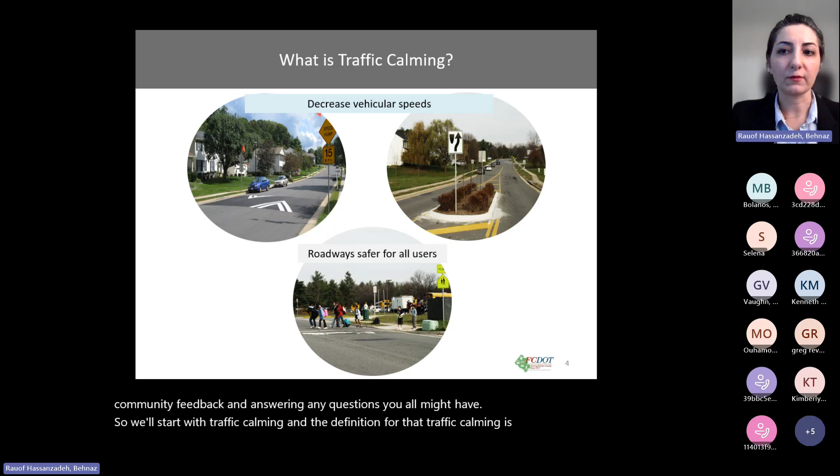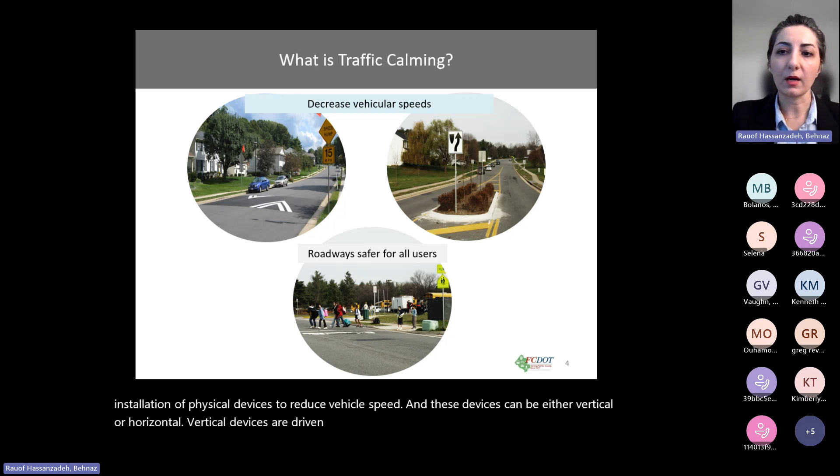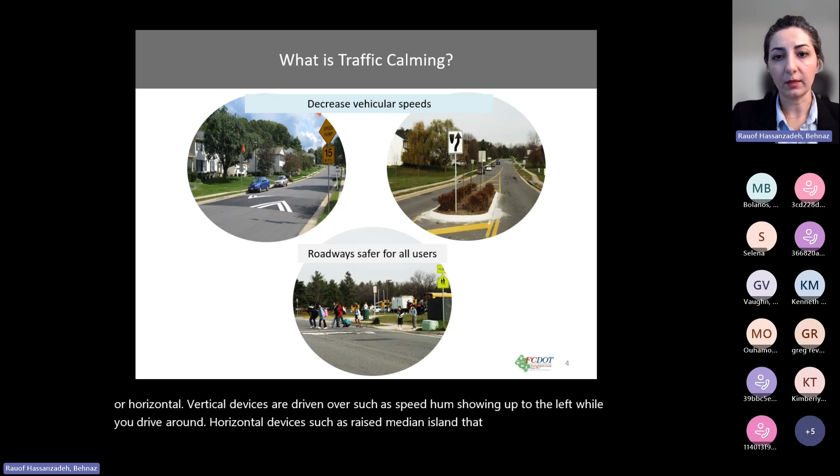We'll start with traffic calming and the definition for that. Traffic calming is generally the installation of physical devices to reduce vehicle speed, and these devices can be either vertical or horizontal. Vertical devices are driven over, such as speed humps shown to the left, while horizontal devices, such as raised median islands, are shown to the right of the screen. Both types of devices make the road safer for drivers, pedestrians, and all other users. And we want you to know that through this process, we are not permitted to install stop signs.

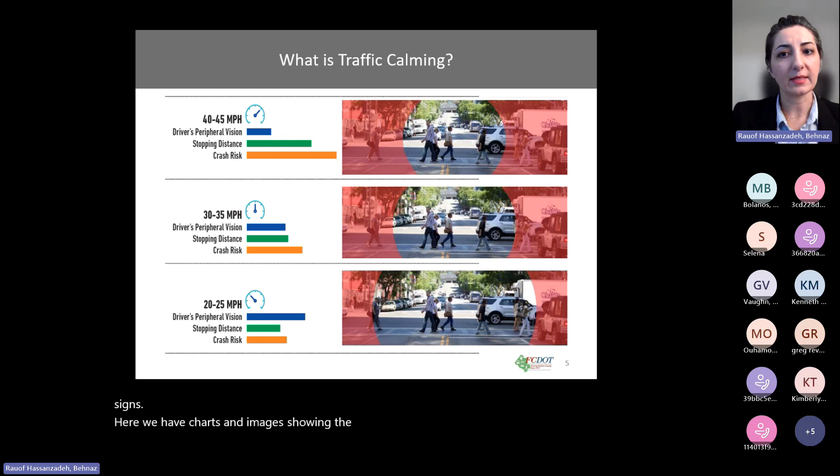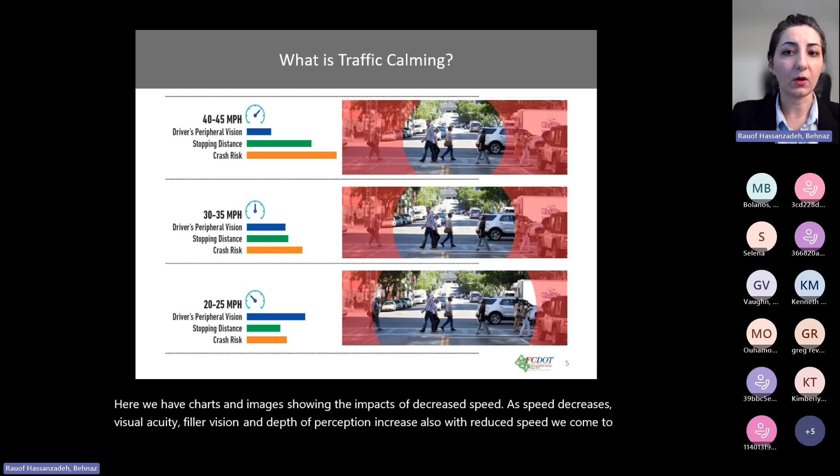Here we have charts and images showing the impacts of decreased speed. As speed decreases, visual acuity, field of vision, and depth of perception increase. Also, with reduced speed, we see a significant reduction in the number and severity of crashes involving motor vehicles.

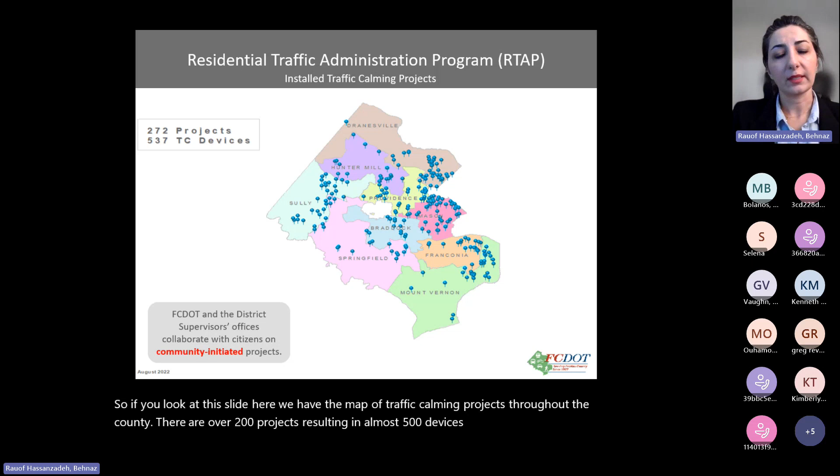If you look at the slide here, we have the map of traffic calming projects throughout the county. There are over 200 projects, resulting in over 500 devices countywide. Every district has these devices, and chances that you've driven over one are pretty high.

The RTAP program can be broken up into 5 steps. Step 1 is project initiation, step 2 is plan development, step 3 is community engagement, step 4 is ballot phase, and step 5, the final step, is project installation. Let's go through each step one by one.

As you might know, all traffic calming projects are always community initiated. The process begins with a request from the community to the supervisor's office. Once the request is received, we will first complete a basic eligibility review. Next, we will conduct the traffic study, and once it passes both the eligibility and traffic study, the community then forms a task force.

There are eligibility requirements that need to be met: the road needs to be a VDOT maintained road, have a 25 mph speed limit, be functionally classified as local, collector, or arterial, and if it is collector or arterial, it needs to be a residential street.

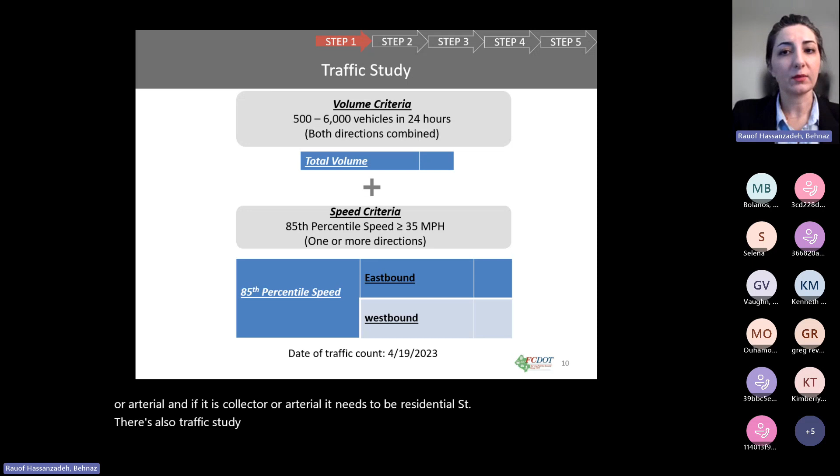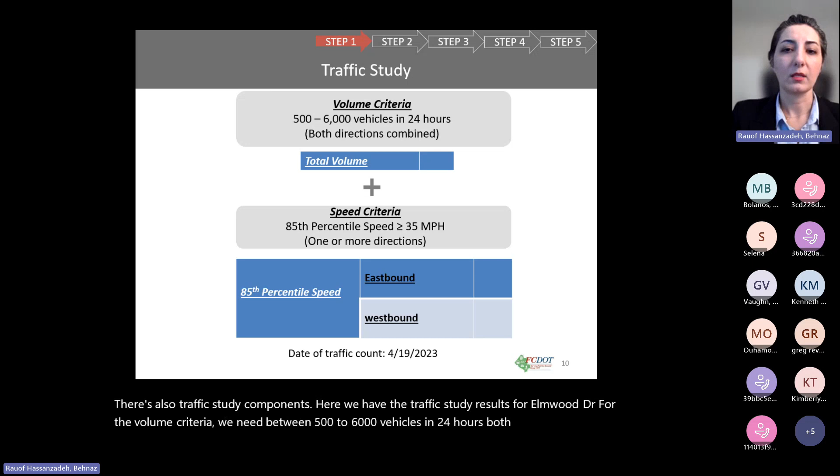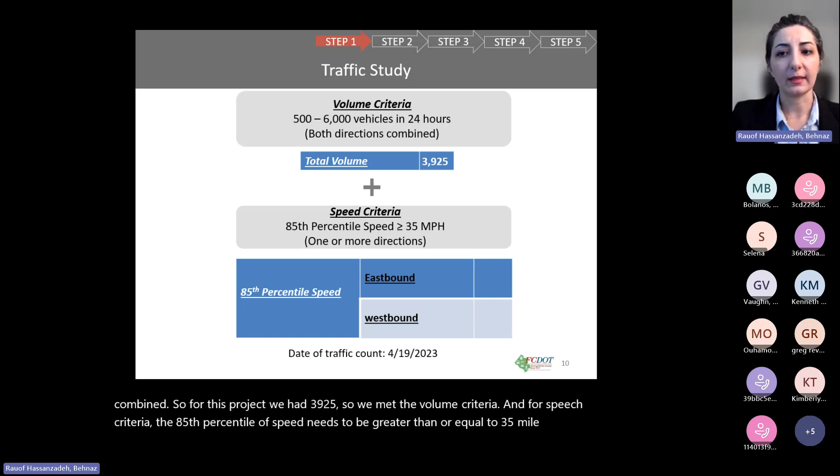There are also traffic study components. Here we have the traffic study results for Elmwood Drive. For the volume criteria, we need between 500 to 6,000 vehicles in 24 hours, both directions combined. For this project, we had 3,925, so we met the volume criteria. For speed criteria, the 85th percentile of speed needs to be greater than or equal to 35 mph in at least one direction of travel. The speed that we found was 40 on eastbound and 35 on westbound, which means we met the speed criteria as well.

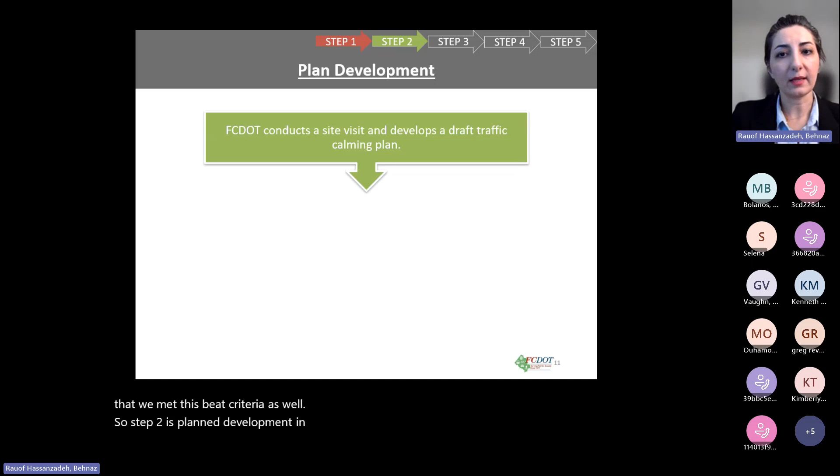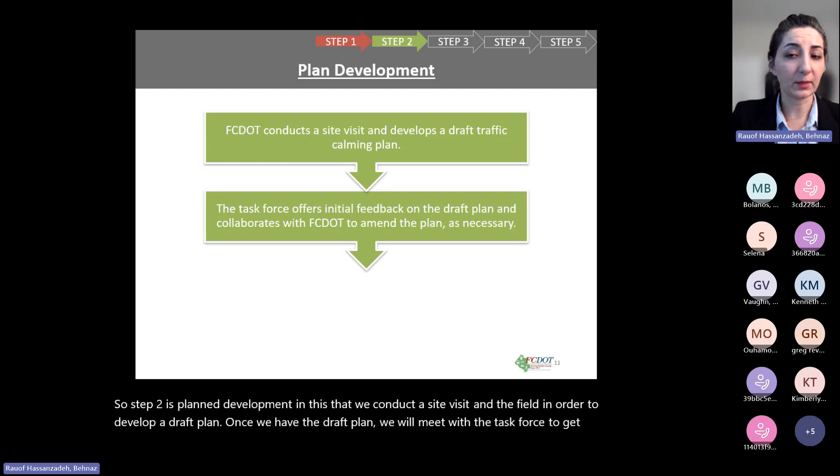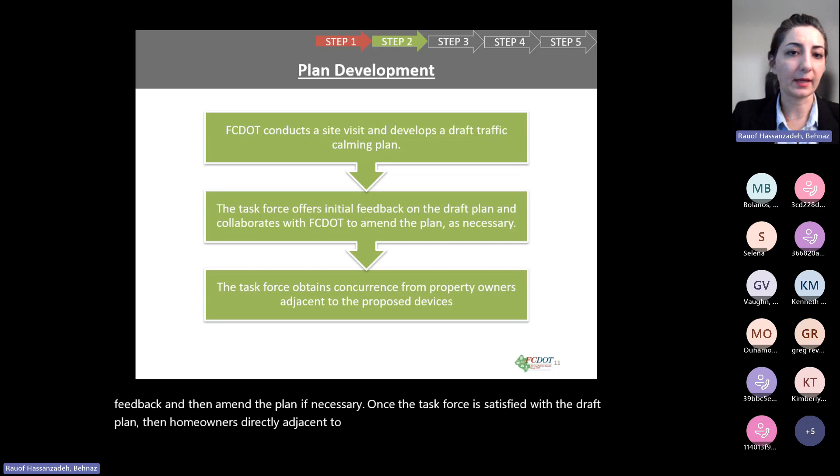Step 2 is plan development. In this step, we conduct a site visit in the field in order to develop a draft plan. Once we have the draft plan, we will meet with the task force to get feedback and then amend the plan if necessary. Once the task force is satisfied with the draft plan, homeowners directly adjacent to any proposed measures will need to sign off on the placement of the device in order to move on to the next step.

Here we have device placement requirements as well. Based on the guideline that we have, we need minimum 300 feet between measures and from existing stop conditions. We need minimum of 150 feet from any intersections, minimum of 150 feet for adequate sight distance with any device, and it has to fit on the existing roadway.

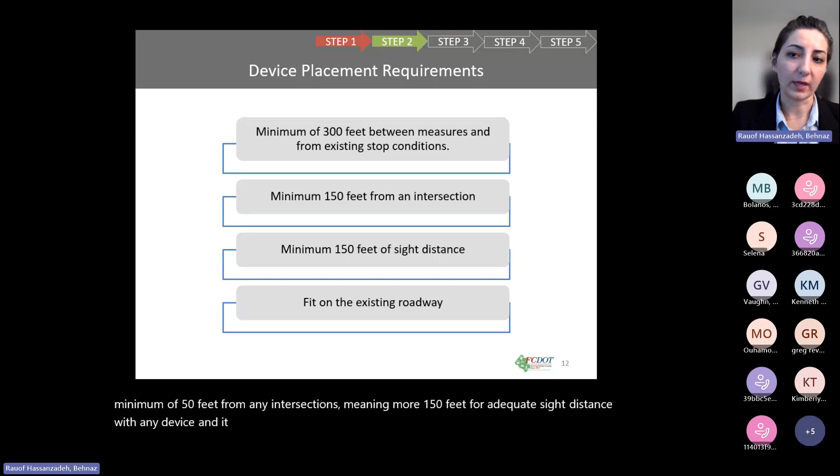So we have to take into account any driveways, manholes, or utilities, and we also account for the grade of the road.

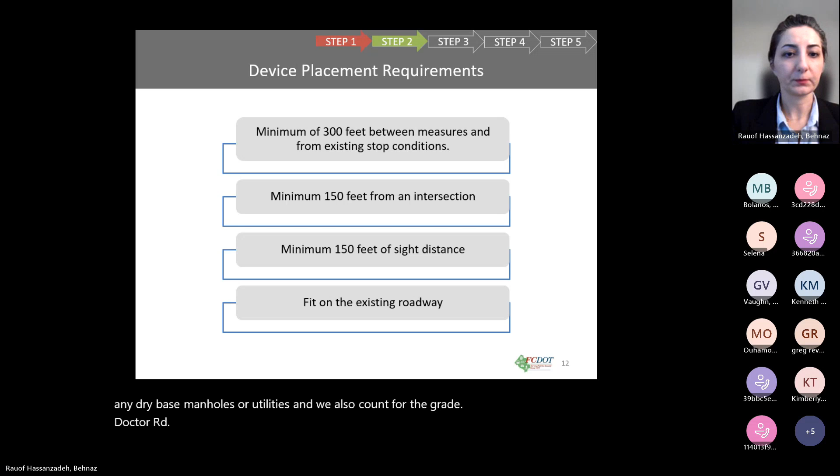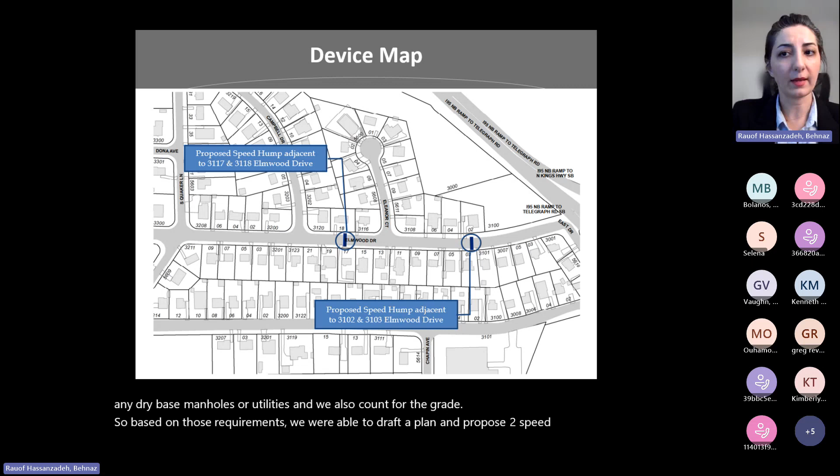Based on those requirements, we were able to draft a plan and propose 2 speed humps on Elmwood Drive, as you can see on the map here. The addresses listed here are the ones that need to sign off because the devices are adjacent to their homes.

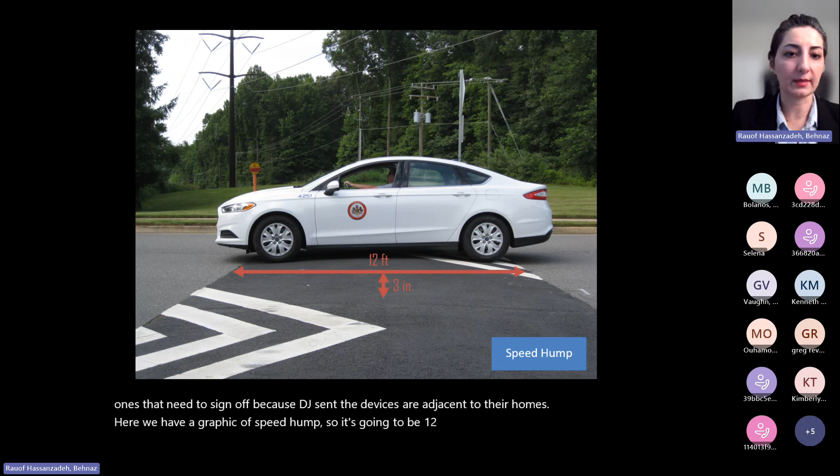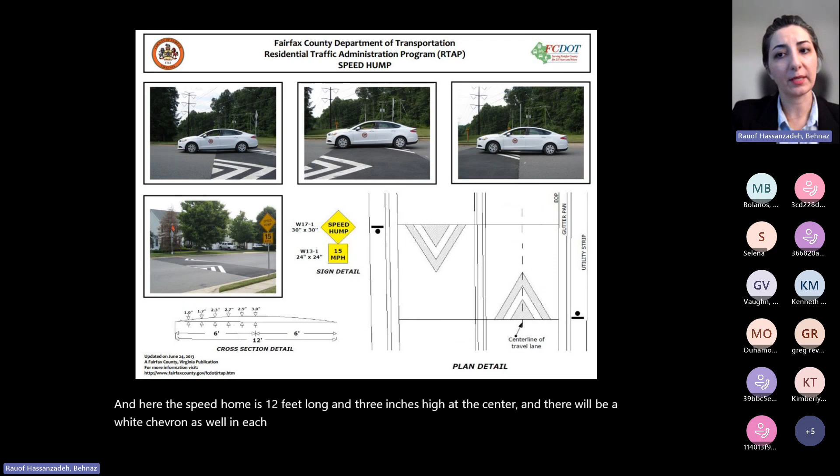Here we have a graphic of the speed hump. It's going to be 12 feet long and 3 inches high at the center. There will also be a white chevron in each travel lane and speed hump signs with a recommended speed of 15 miles per hour on each side of the speed hump.

So step 3 is a community meeting, where we are here tonight. This is where we present the plan for the community to obtain feedback. Based on the feedback, the task force will decide whether to amend the plan or proceed to the next phase. If the task force decides to move forward, we can move to the next step, which is the ballot phase.

In the ballot phase, each household in the ballot area will receive 1 vote. It will need to be sent directly to the district supervisor's office. The ballot period will be open for a minimum of 3 weeks, and the supervisor's office will tally the votes and notify the task force of the results.

There are 3 ways to return your ballot by the deadline. One way is to mail the ballot. You can also hand deliver it to the supervisor's office, or email it to the supervisor's office. Please do not return your ballot to the task force, and please use one of the methods listed above.

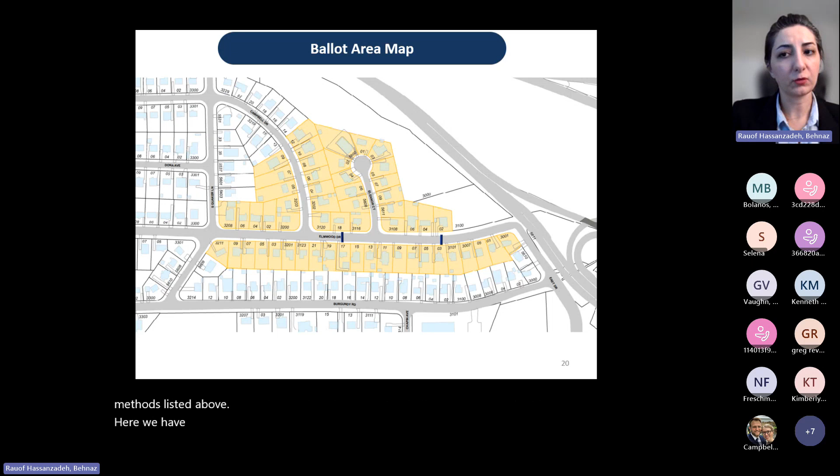Here we have the ballot area map for Elmwood Drive. There are 55 ballots. In order for the proposed plan to move forward, we would need greater than 50% of all households to vote in favor. So we would need 28 yes votes in order to move to the next step.

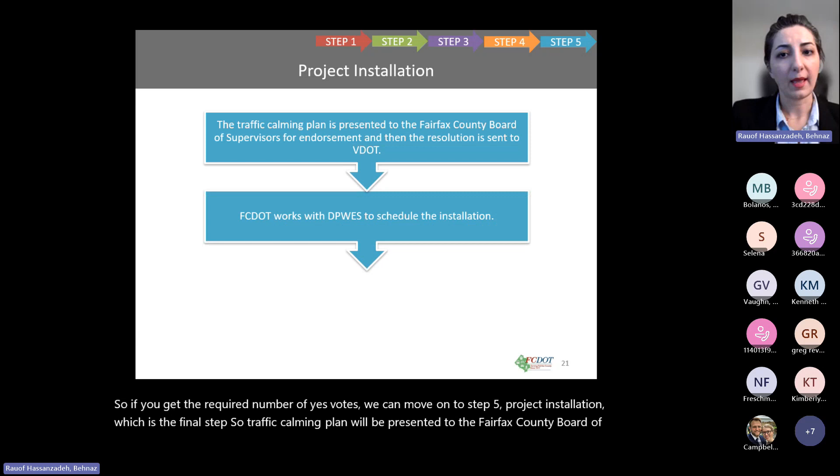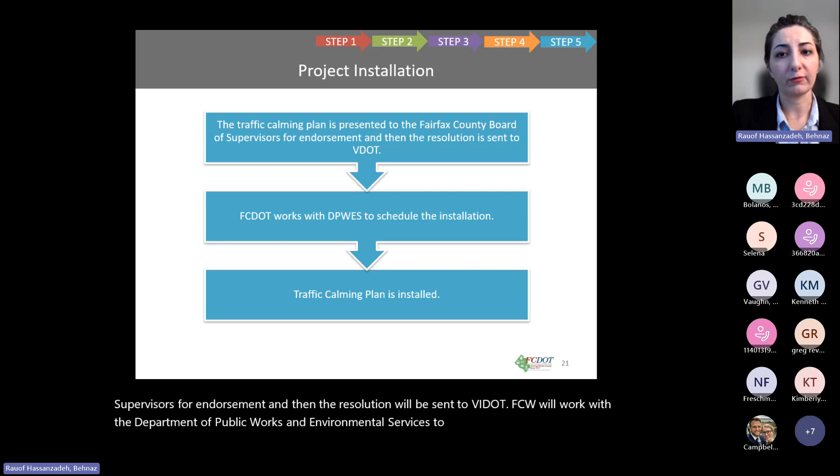If we get the required number of yes votes, we can move on to step 5, project installation, which is the final step. The traffic calming plan will be presented to the Fairfax County Board of Supervisors for endorsement, and then the resolution will be sent to VDOT. FCDOT will work with the Department of Public Works and Environmental Services to schedule installation, and finally the traffic measures on the plan will be installed.

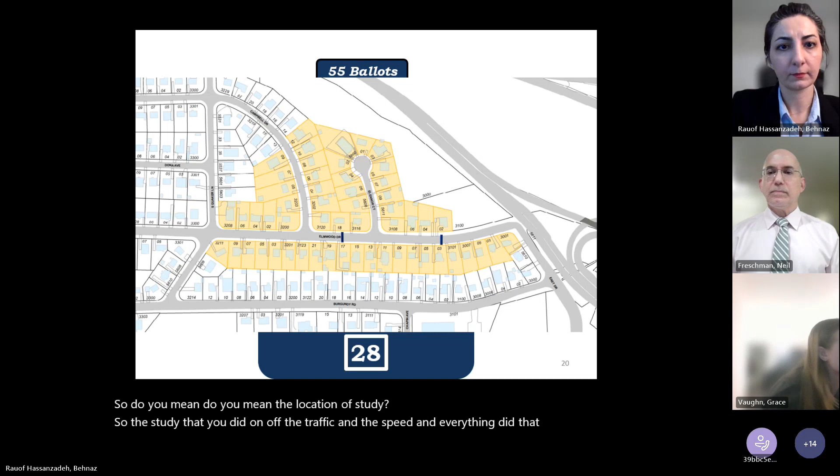Can you hear me? So do you mean the location of the study? Yeah, the study you did on all the traffic and speeds, did that include East Drive and the corner there, the intersection of East and Elmwood, or just a portion of Elmwood? I'm looking for where you did the study, as far as the boundaries of that.

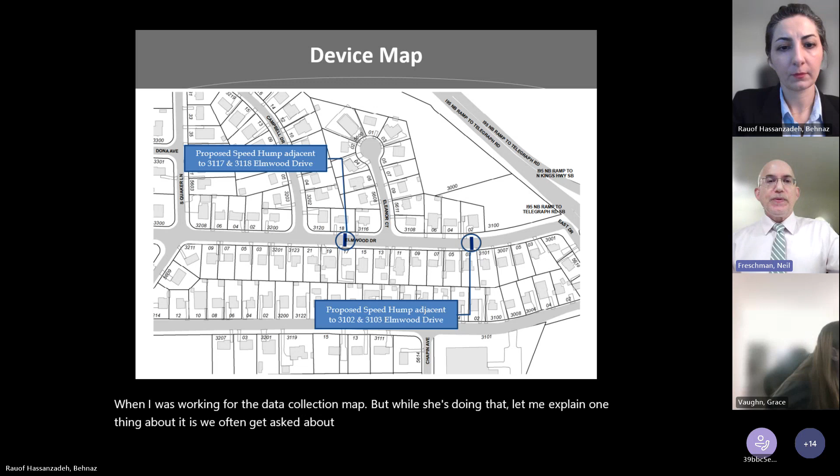Behnaz is looking for the data collection map. But while she's doing that, let me explain one thing we often get asked about the study. The study's purpose is to qualify for the traffic calming program. It's not the same as a comprehensive study we'd do if we were changing a roadway or an intersection. Generally, the data is collected in one or two locations.

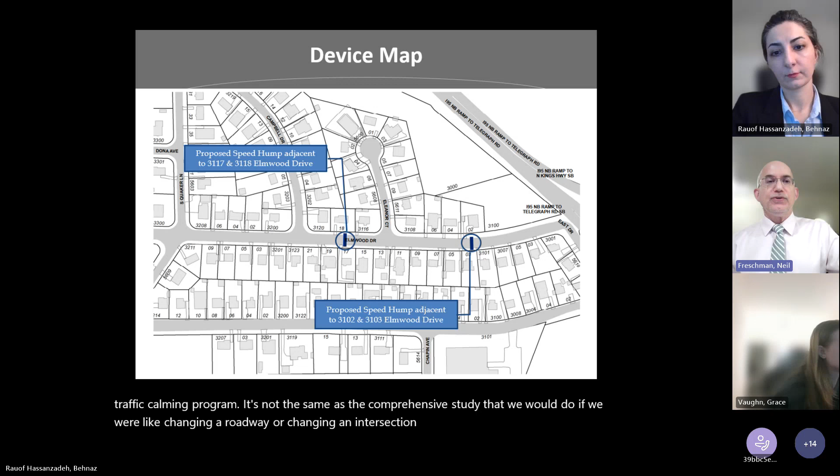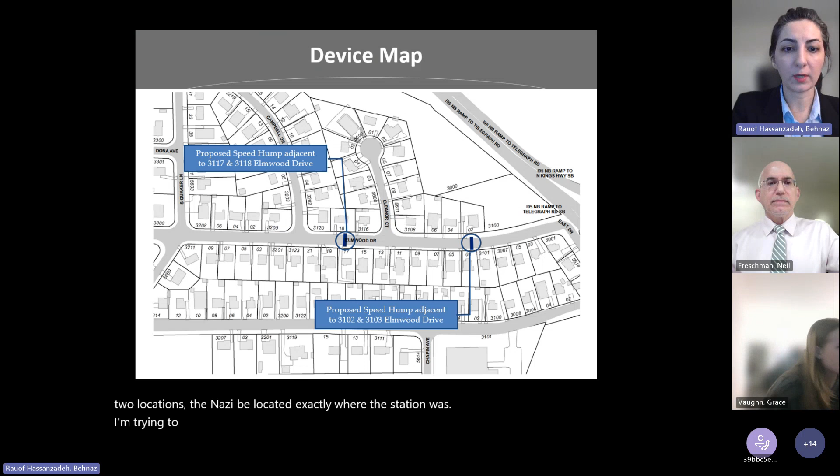Behnaz, have you located exactly where the count station was? I'm trying to find it. I know that the request was from... I can show it, just a second, let me share it.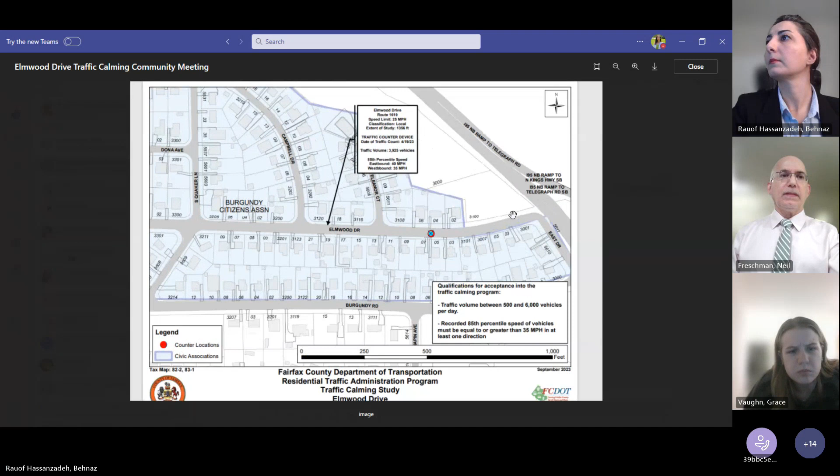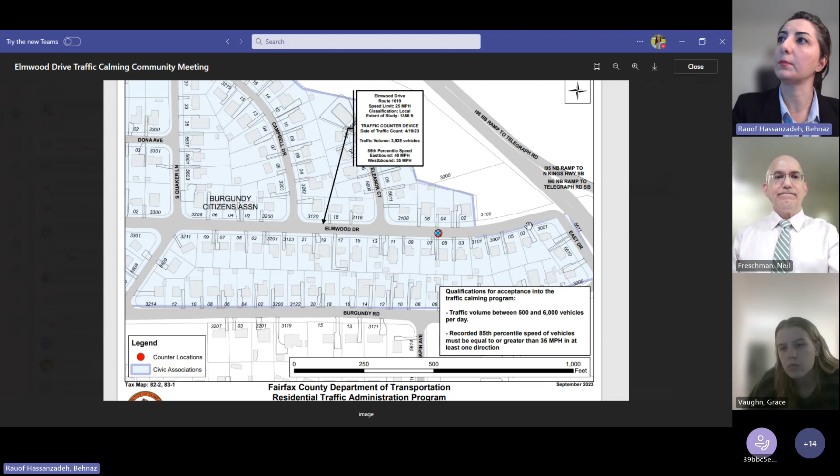Can you see it? Sorry, I'm also on the phone, can you describe the location, Behnaz? Yes, the request that we received to do the study is from South Quaker Lane, up to East Drive. Okay, that makes sense. Thank you, just this part of the road. Yes, that answers my question. Perfect, thank you.

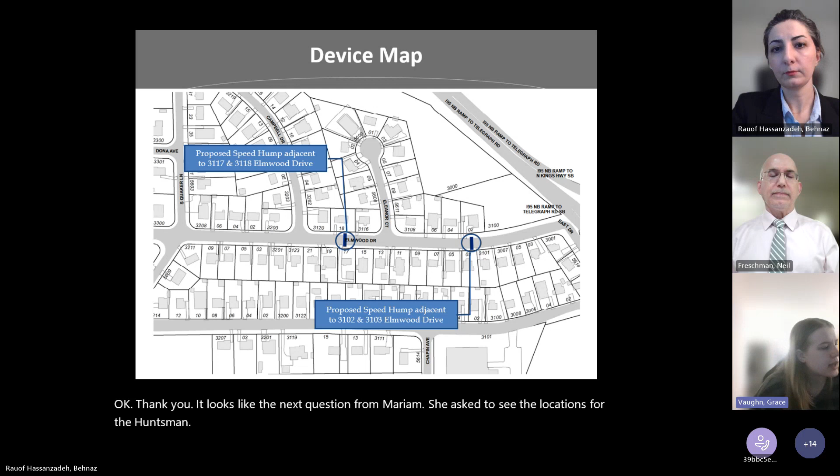Okay, thank you. It looks like the next question is from Miriam. She asked to see the locations for the humps again, and also asked if the data was only collected on the April 2023 date.

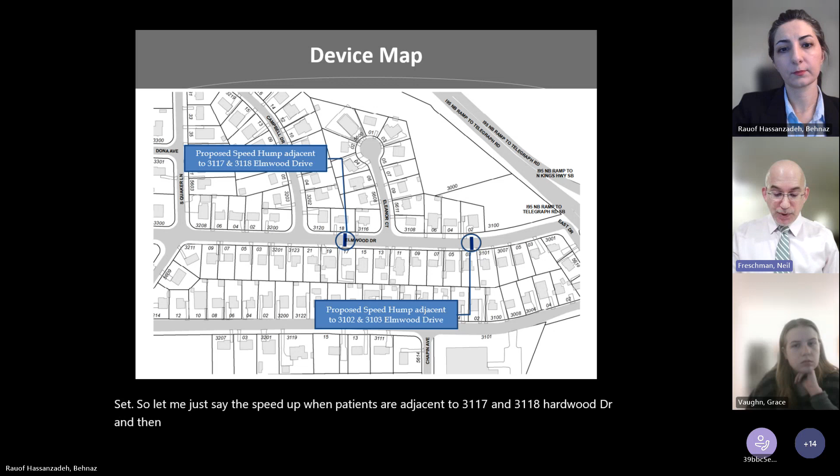Let me just say the speed hump locations are adjacent to 3117 and 3118 Elmwood Drive, and then another speed hump adjacent to 3102 and 3103 Elmwood Drive.

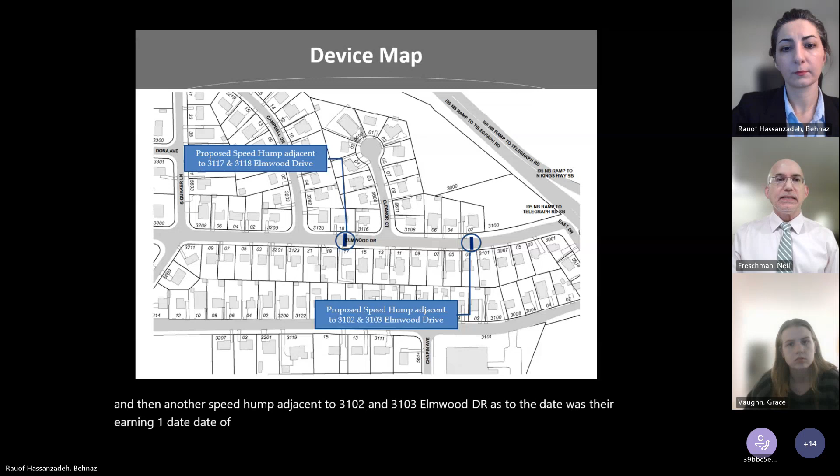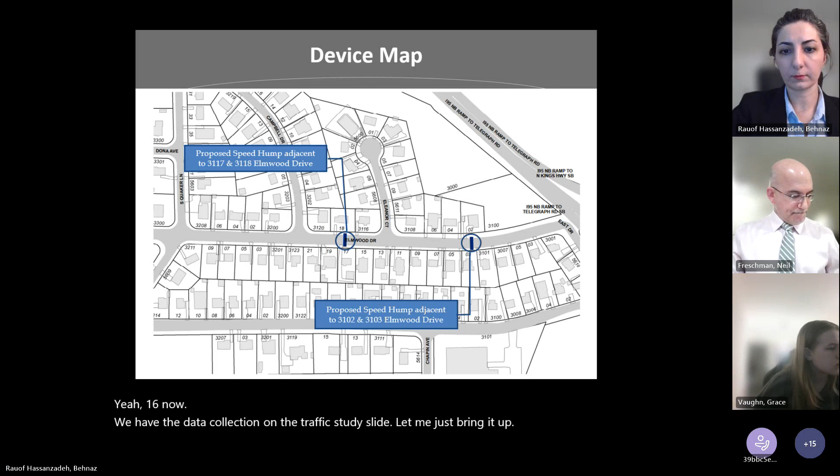As to the dates, was there only one date of collection? Behnaz and Grace, do you know? We have the data collection on the traffic study slide, let me just bring it up. So 2023 is the time we did the study for this road.

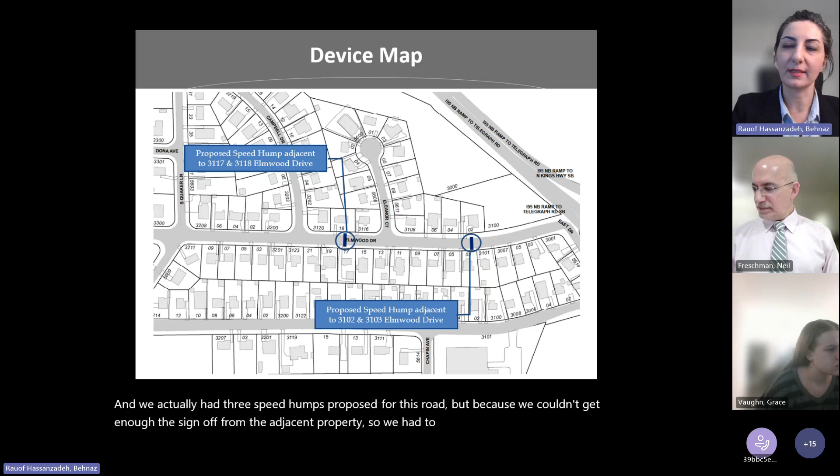We actually had 3 speed humps proposed for this road, but because we couldn't get enough sign-off from the adjacent property, we had to relocate the devices and reduce them to 2 measures along this length of Elmwood Drive.

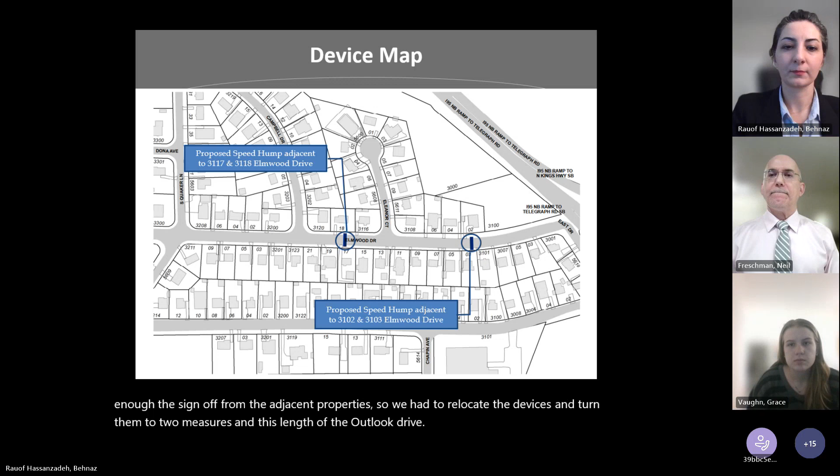Okay, thank you. Miriam also asked if there's any accompanying signage for the humps, and if so, where will they be posted?

Behnaz, are you going to respond to that? Let me see the question again. I'll respond, just chime in if I miss anything. Basically, at each end of this road there will be a sign alerting drivers that speed humps are ahead. Then at the speed hump itself, in each direction, there's a sign alerting drivers the speed hump is right there, so they don't go too fast over it, with a recommended speed of 15 miles per hour, but that's not a speed limit, the speed limit remains the same. It's just a recommended speed.

Okay, thank you. Miriam also was asking about there being a big volume of vehicles and wondering if the study was only taken on one date. So it was just a 1 day, 24-hour study, yes.

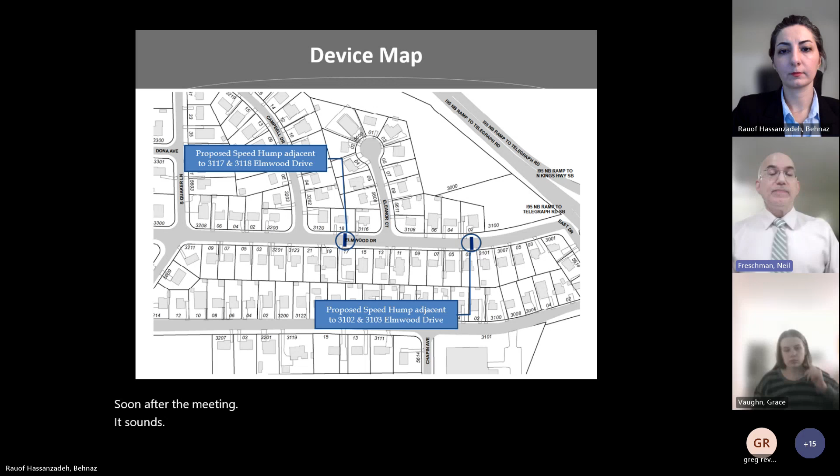As to when that will be done, that is up to the task force. How they are delivered, again, that's up to the task force. They can be mailed to residents or they can be dropped off. The task force will have to decide that. If there is a request to do them in Spanish, in English and Spanish, we can do that.

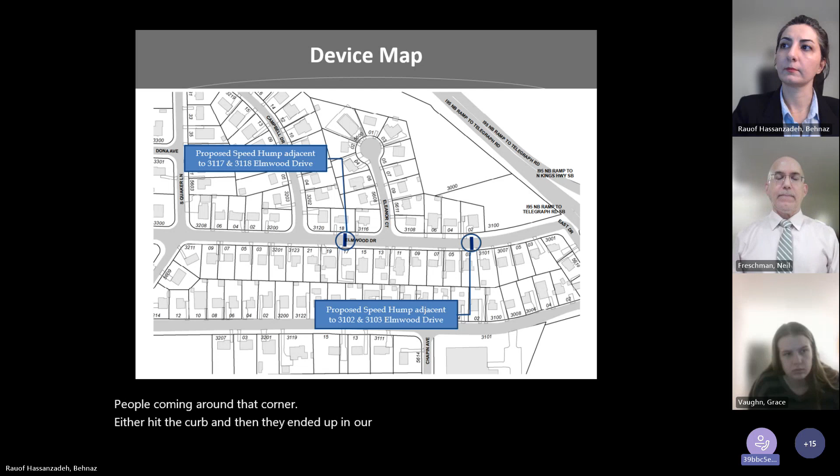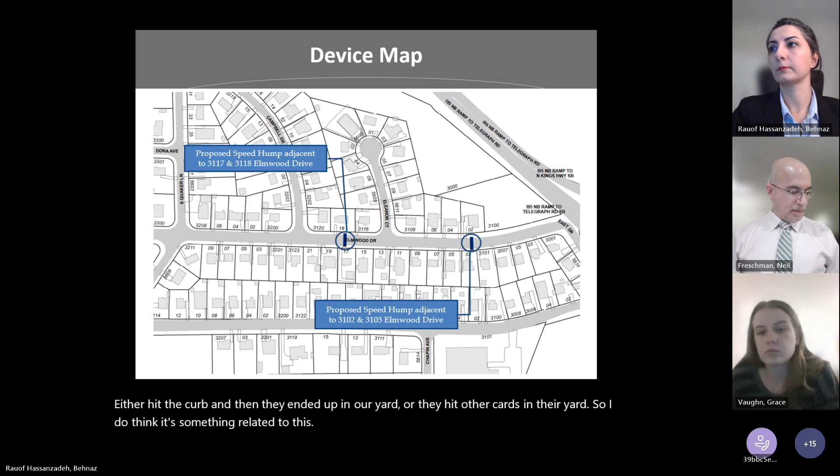Yes, this is Taryn Pohl again. I live in Elmwood, actually at 3003, right at the corner of East Elmwood. I wanted to respond to my other neighbor's comment about the speed around the corner. This year alone, I've had 2 cars end up in my front yard because of crashes on the corner from people coming around that corner quickly. They either hit the curb and ended up in our yard, or they hit other cars and ended up in our yard. So I do think it sounds like normally people slow down around the corner of East Drive, but that's not the case. As a neighbor, I just wanted to voice that corner is quite dangerous and gets a lot of speeding and accidents happen. I can attest that it does happen in that space.

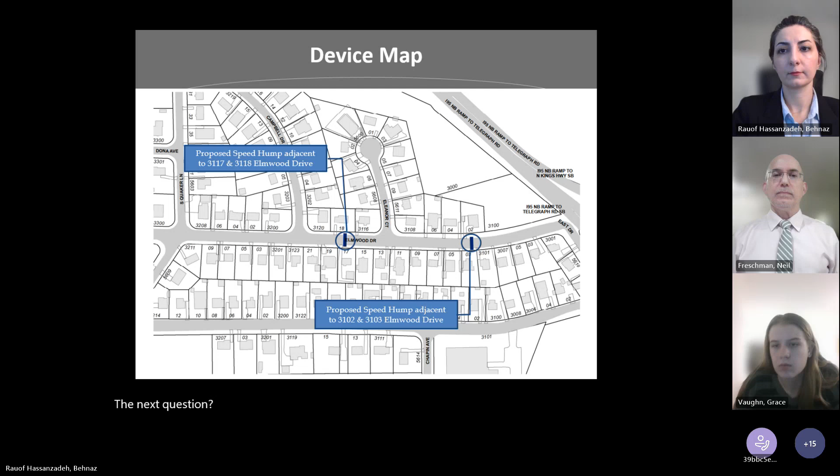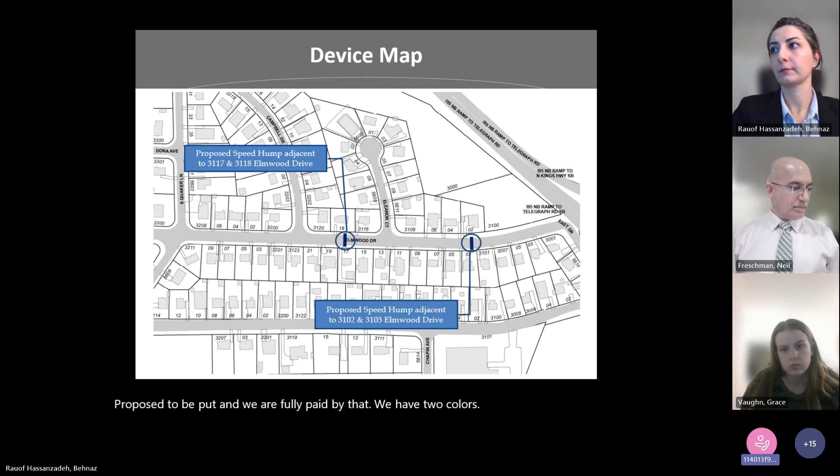Hi, my name is Dolores Owen. I just wanted to comment also with the young lady who commented just now about Elmwood and East Drive. My husband and I lived at 3102, where it's proposed to be put, and we are so in favor of this. We've had 2 cars, we've been here 53 years in this neighborhood. Just last week, our neighbor at 3106 had a car, and the fence on the corner at 3108 was torn down by a driver. Now we sit in our living rooms, and we hear people when they start at the corner of East Drive coming into Elmwood, and we hear them rev it at night. Now that's a speeding problem, I understand. Of course, we don't have radar anymore in here, but it has been. I'm really afraid for the children and the people trying to cross the street also. But in the 53 years we've lived here, I can't count how many accidents and problems there's been because of speeding on this road. So I'm totally in favor of this. Thank you.

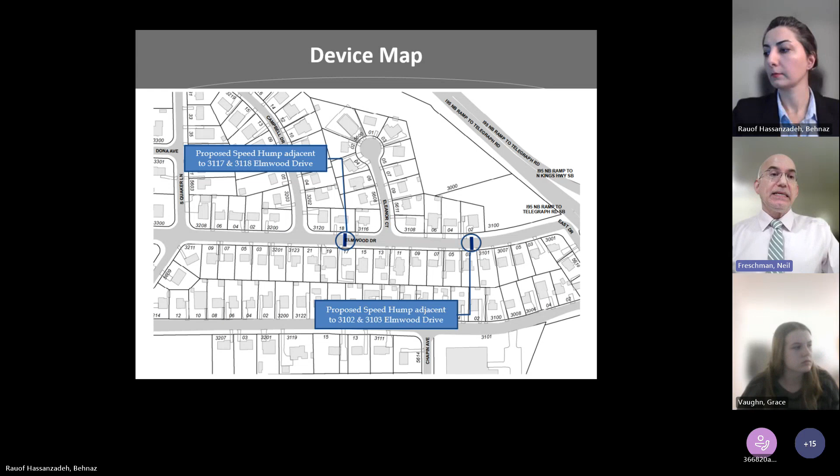Except in some very specific cases, in school zones and in work zones. The Virginia General Assembly is looking at that. They've looked at it before, so I don't know for sure what the law will be in 6 months or a year. But in Fairfax County, we can only do things that are authorized by the General Assembly. So right now we can't do that.

One other thing you could do, though, even in the near future, is request from the Franconia Board Office if they can help get speed signs or speed trailers out there. The police have a few signs, but they are just temporary. Usually the police put them out for 1 or 2 weeks, then move them to other locations in the district. You can always request additional enforcement, although we all know the police are pretty burdened with a lot of requests. But those are sort of the tools at our disposal beyond traffic calming.

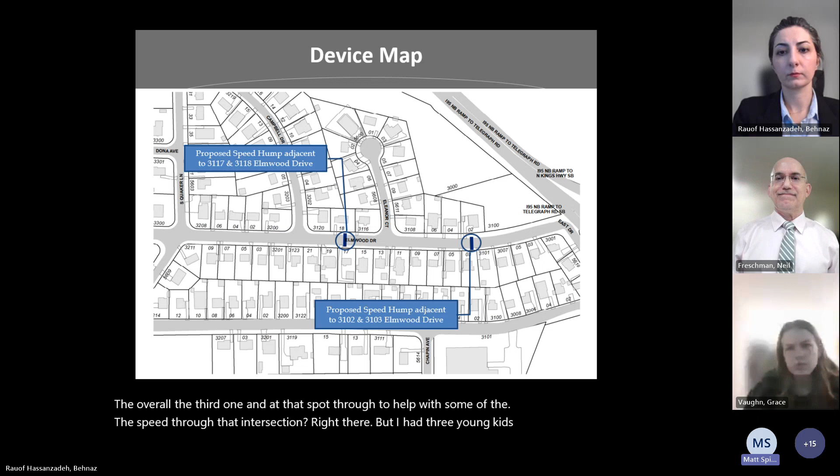Hello, thanks for allowing me to speak here tonight. I own a house on the corner of Quaker and Elmwood, and people used to come flying through that intersection on Elmwood, with disregard of the stop sign that's right there. I wonder if any consideration was given to moving one of these speed humps closer to that intersection, down a block on that 3200 block, or adding a third one in at that spot to help with some of the speeding through that intersection. I had 3 young kids, I have 4 now, but when I lived there it was always a little treacherous playing in the front yard. So any consideration about putting one closer to that stop sign?

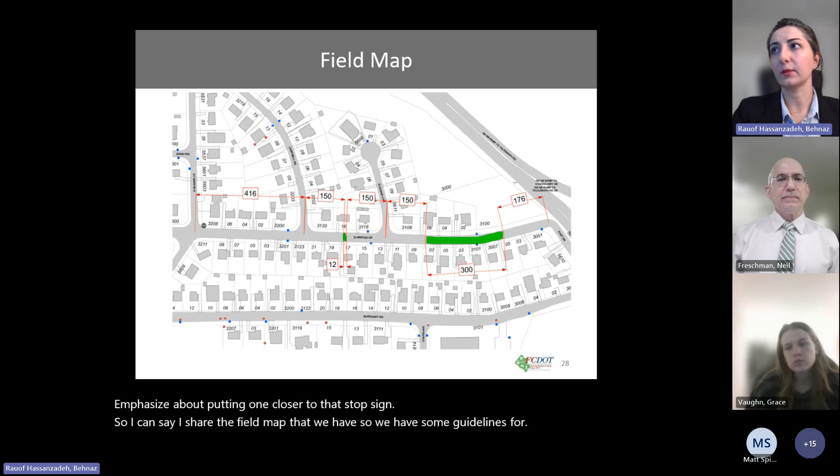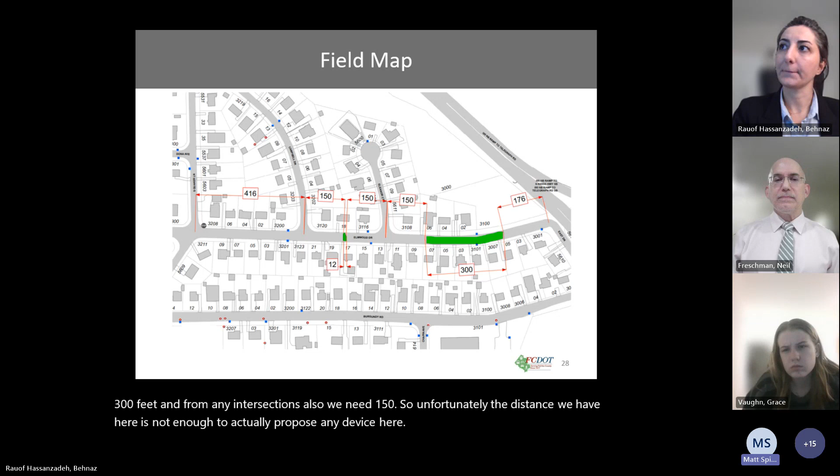Well, I can say I shared the field map that we have, so we have some guidelines for proposing the measures. As you can see here, because of the stop signs, the distance should be 300 feet, and from any intersections also we need 150. So unfortunately, the distance we have here is not enough to actually propose any device here. Okay, so it's got to be 300 feet from the stop sign and 150 feet from an intersection. Correct. Okay. Wow. Sorry about that.

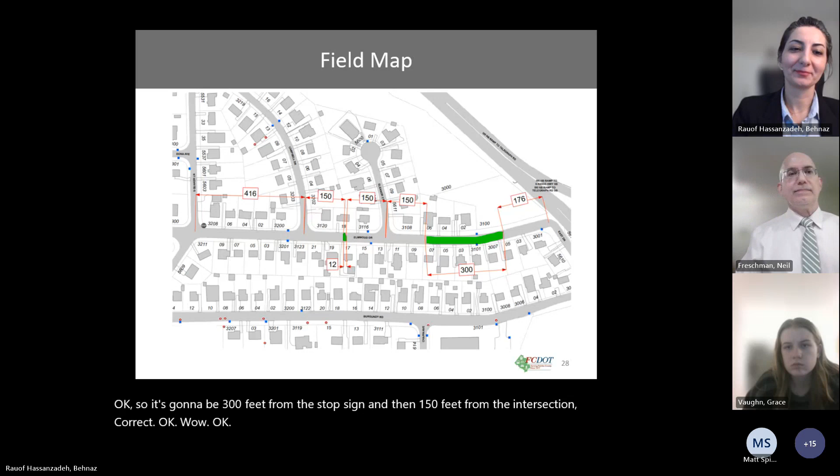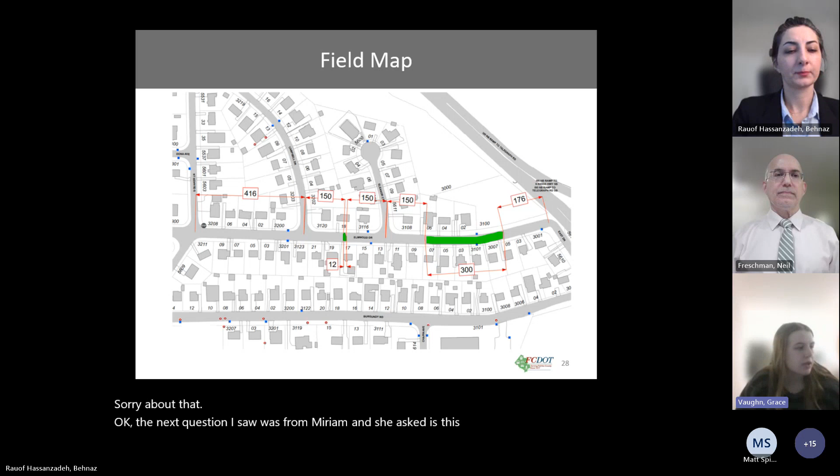Okay, the next question I saw was from Miriam, and she asked: is this part of a broader effort to reduce the speed limit on Elmwood? Not advocating for that per se, but trying to understand, is there any future plans for speed monitoring, control, or mitigation? If yes, what is the process for that? A similar public engagement or ballot measure.

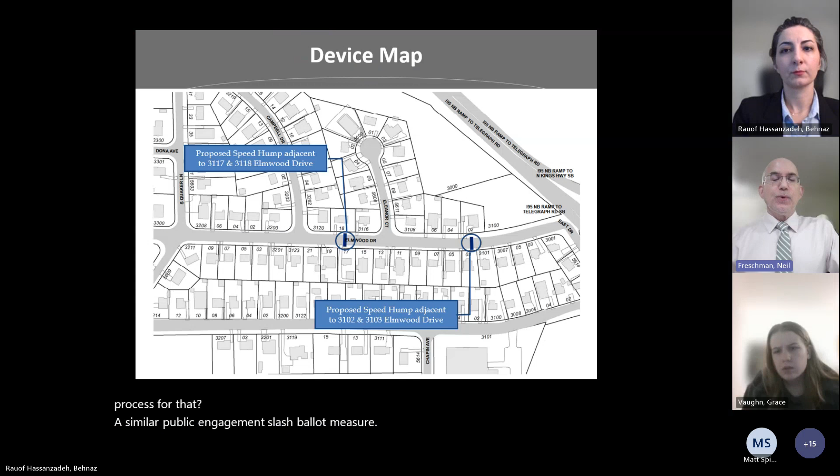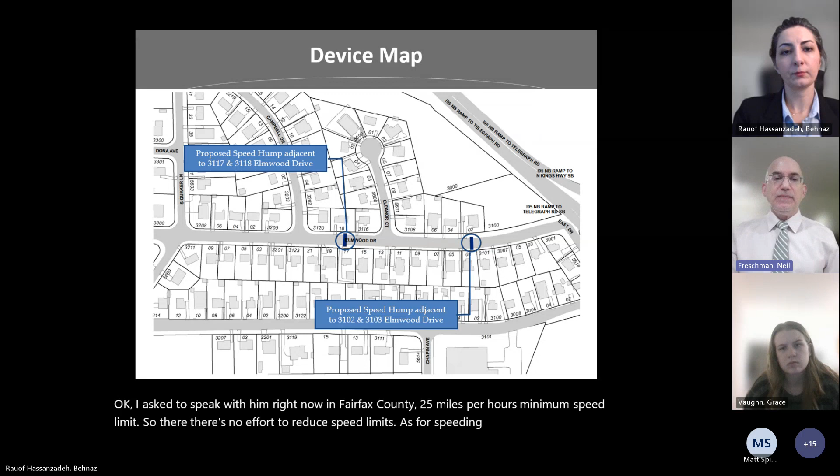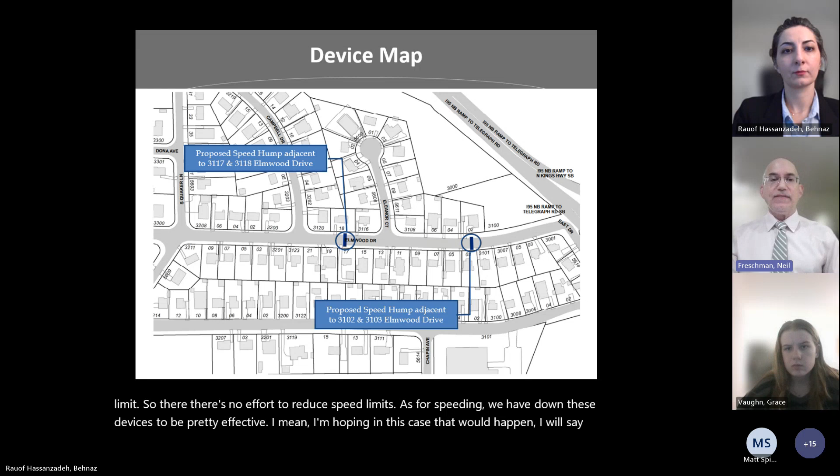Well, as to speed limit, right now in Fairfax County 25 miles per hour is the minimum speed limit, so there's no effort to reduce speed limits. As for speeding, we have found these devices to be pretty effective. I'm hoping in this case that would happen. I will say that speeding and careless driving is an issue all over the county, and we do what we can, but there's no magic bullet that's going to correct this. It's driver behavior, and then trying to put in devices to slow folks down.

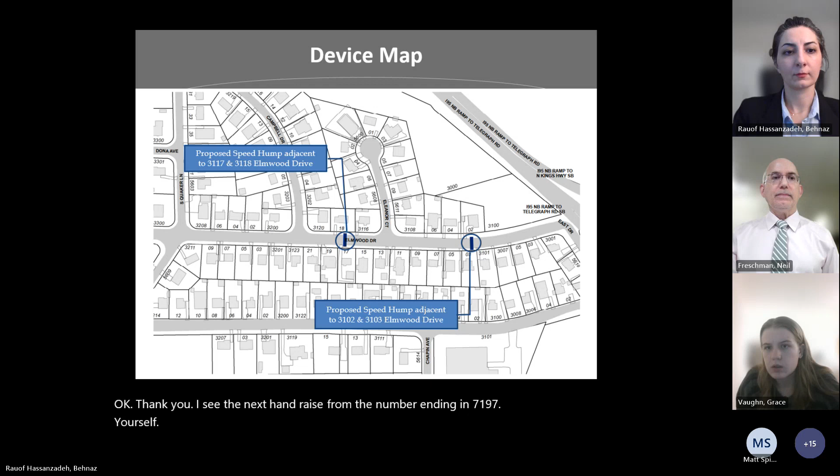I think I did that by mistake, I apologize. Oh, that's okay. Greg, I will send you a request to unmute.

Can you hear me? Yeah, yes, we can hear you.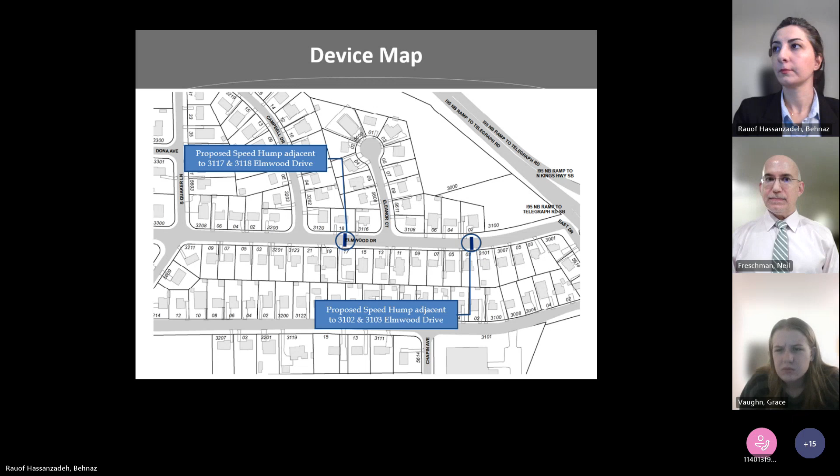Thank you. I found out about you through the Nextdoor app, but a better way, I was wondering if there's a contact, an email, that we could be updated through your office. Is that through the district supervisor or a VDOT contact person? The second part is more of a comment: the stop signs that were put up there about 20 or 25 years ago were part of a similar effort to reduce the speeds that have been going on.

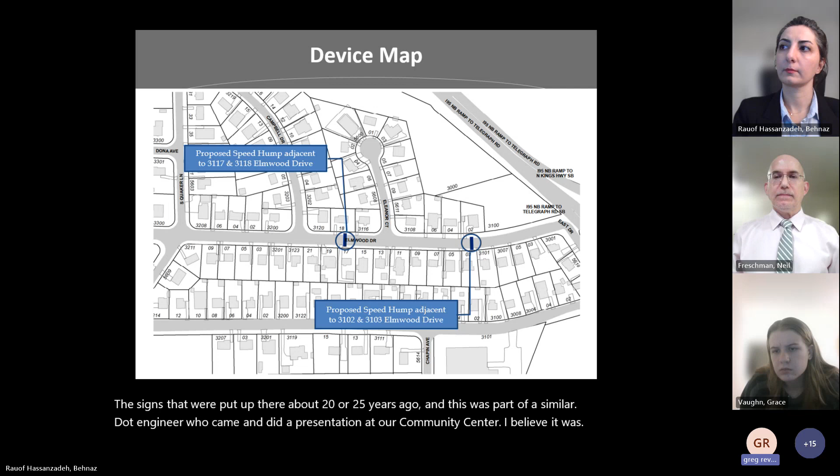I recall the VDOT engineer who did a presentation at our community center indicated that stop signs, from an engineering and regulatory standpoint, were not supposed to be used for speed enforcement, but that is the purpose they were put up for. Ostensibly it's not supposed to be that way, but that is what it was. So we made the effort to slow traffic down, and that's how we got those two stop signs on Elmwood, and it probably has been somewhat effective, thankfully. But my main thing is just additional contact we could get to stay in touch through emails or something like that. Thank you very much for your time.

So I'll handle the second issue first about the stop signs. That is correct, that in the past, before any of us were working at the county, there was a program to install stop signs, but that is no longer the case. VDOT ended that program, and you're correct that stop signs really are not supposed to be used for speed control. They're supposed to be used for traffic control and safety. So VDOT no longer does that, but the signs installed in the 90s and early 2000s, they are not making an effort to remove them.

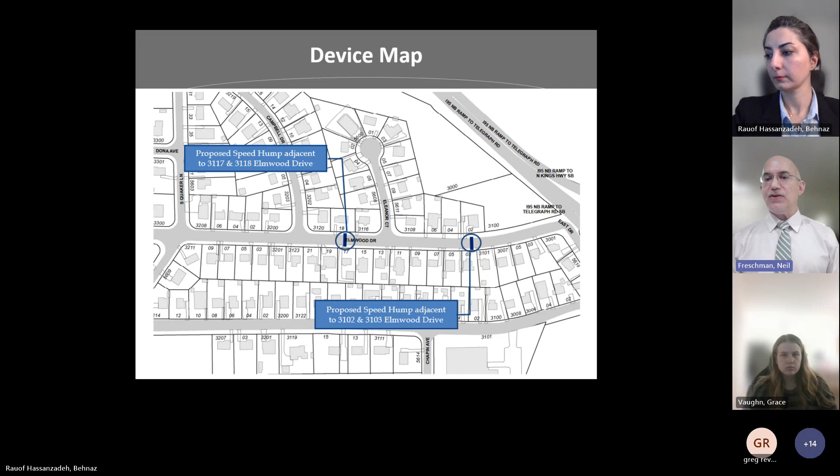As to contact information, the preferred way would be to go through the task force. However, if you want to contact us directly, you certainly can, but it's just easier if things go through the task force, or Aaron just sent a comment. The only reason I'm saying that is so everyone gets the same information and there's not a lot of different information going around. But Aaron just did that. And your question about the district office, yes, that's the supervisor district office, not the VDOT district office.

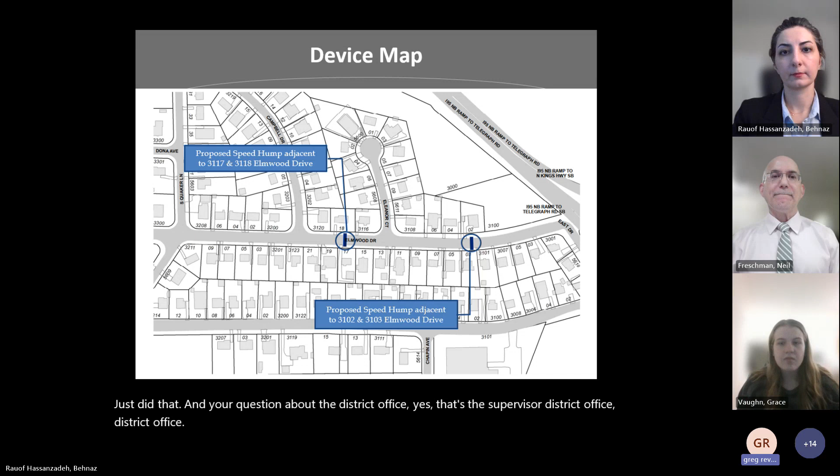So then with the task force, is this the only way to contact through Nextdoor, or is there some contact through the task force?

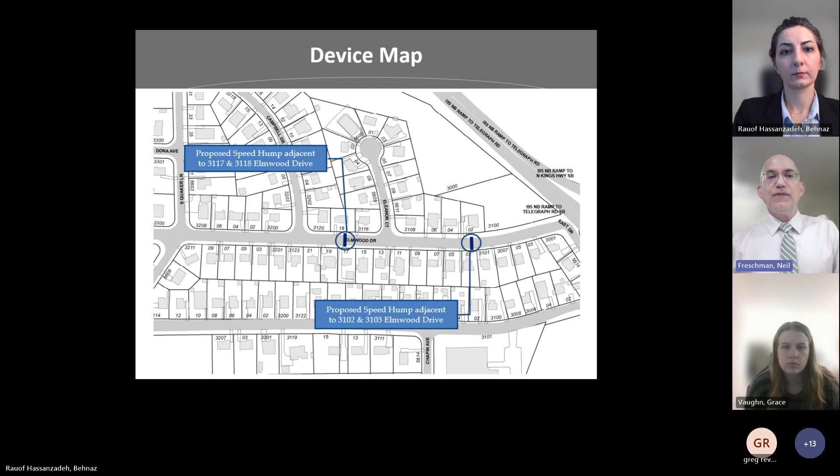That I'm not sure of. Hopefully Aaron would be able to help you with that, Aaron Campbell. I think he put his contact information in the chat. Is that correct? I was looking to see if Marcos, who is your task force lead, could put his email in the chat. Yeah, go ahead, Marcos, that's fine.

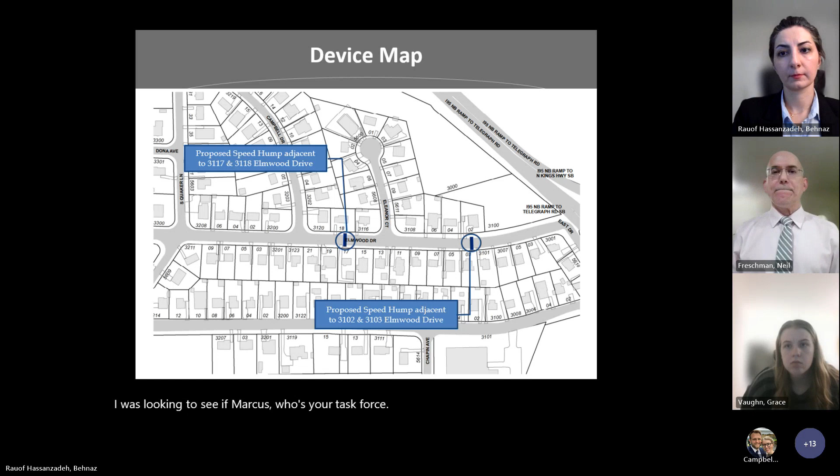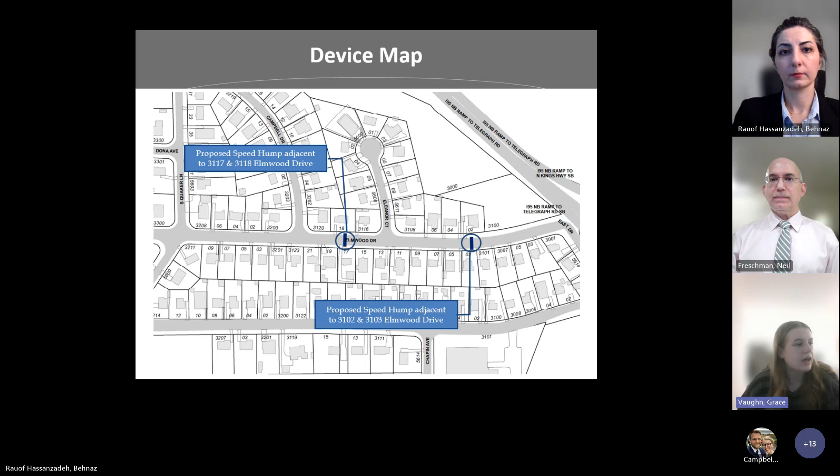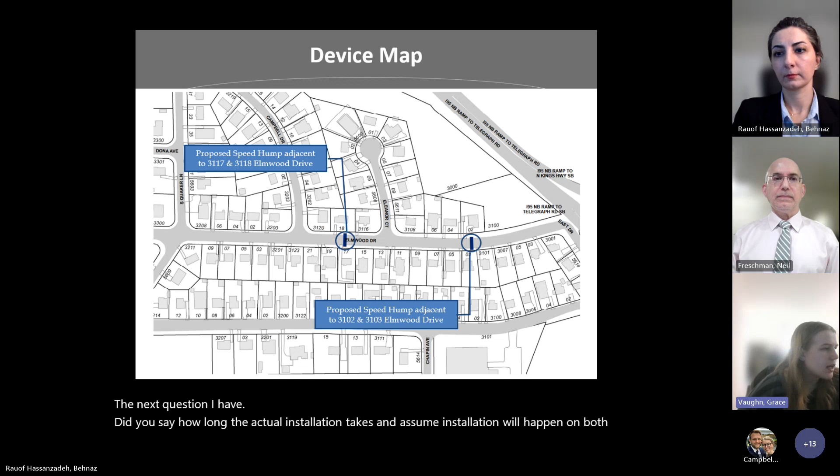Okay, I believe the task force lead's email has been shared in the chat. The next question I have from Miriam: did you say how long the actual installation takes, and assume installation will happen on both of them at the same time? Any impacts to through traffic while they're being installed? Thank you.

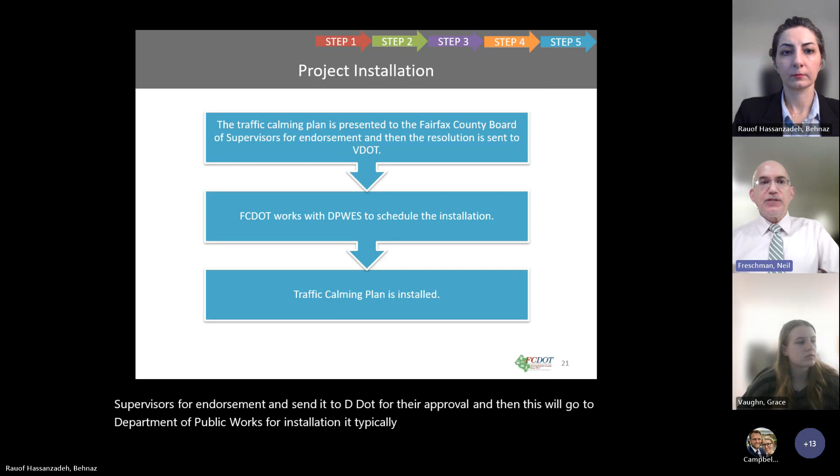Yeah, so just quickly reviewing the process: if the ballot passes, we will take this to the Board of Supervisors for endorsement and send it to VDOT for their approval, and then this will go to Department of Public Works and Environmental Services for installation. It typically happens in spring, summer, or fall. There are several traffic calming plans already at DPW in the queue, so this will just be added to that queue. I can't give you a definitive time for when that would happen. It really depends on when each step happens.

As to impacts, I know that they set up maintenance of traffic. I think it's just a day or two of construction. Put it this way, it's not a long-term construction, and there would be some impacts while it's being built, but it might only be for a day or two. Generally, I think they try to keep the road at least partially open, like maybe one lane in each direction. So there will be some impact, but not a huge impact.